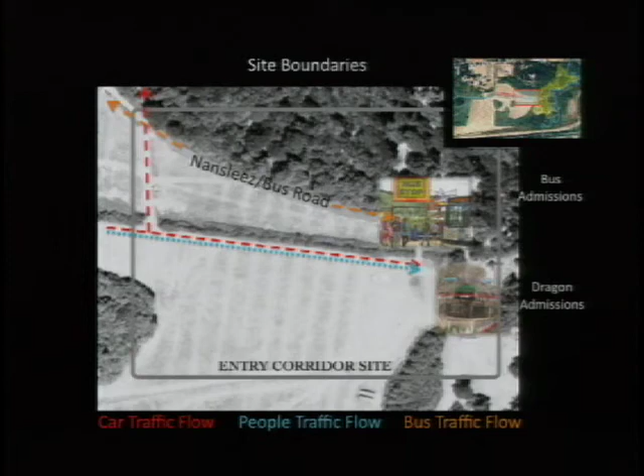The entry corridor is typical of crowds, sun, dust, and traffic.

Therefore, my third goal is to enhance the corridor by creating more comfortable places for humans, both aesthetically and environmentally.

The entrance area is recognizable because of the dragon in the Dragon Plaza and the pole star in the bus wait zone. These icons help people orient themselves and establish the mood of what's to come.

The bus zone is currently an unorganized area where people, bikes, motorcycles, and various demonstrations take place. As the fair closes in the evening, thousands of people find themselves waiting in line in this area before they exit by bus or by car.

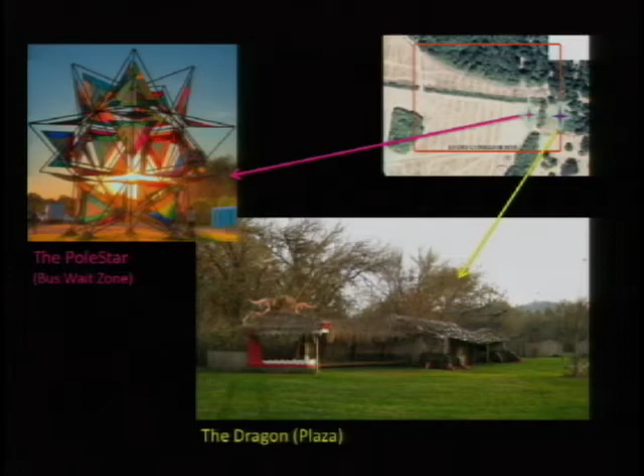The entry corridor before, and my proposed entry corridor. The entry corridor is broken up in my project into three major zones.

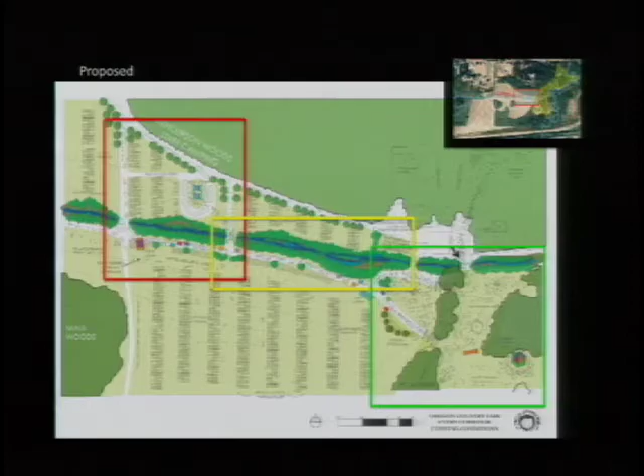The first zone is farthest west and is the place where cars, buses, and people transition from outside the fair to entering the fair.

The gate itself is given a large tent and followed shortly thereafter by periodic clusters of ash trees. The idea here is to give humans more shady places to rest and to begin building a feeling of arrival.

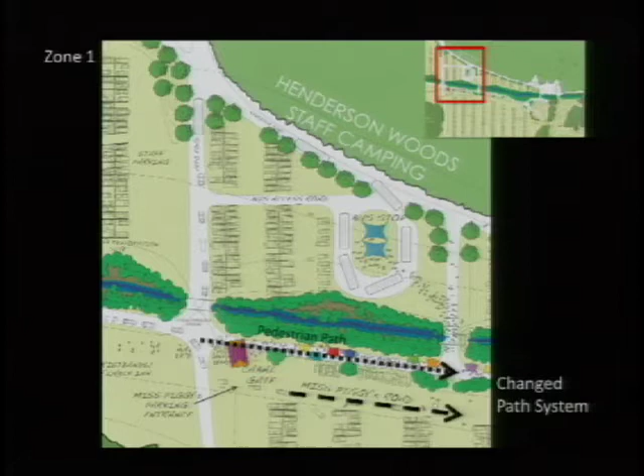One of the most dramatic changes to happen in the active programming of this area is the creation of a new bus stop zone located north of the Indian Creek.

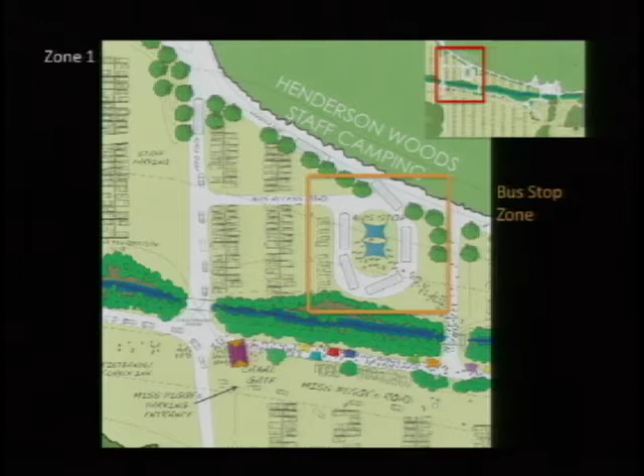The bus zone would be a semi-permanent tensile structure, and the area would be large enough for many hundreds of people to hang out in and around.

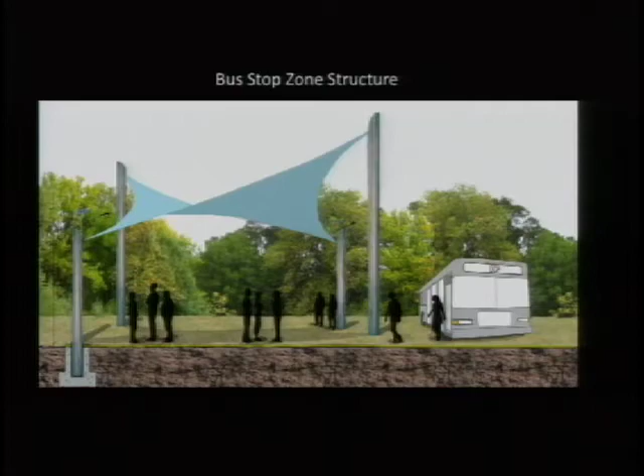For people needing direct access to the front entrance, a shuttle would be available for their assistance. For all others, their entrance to the fair would now be joined with the masses by means of a new bridge. The placement of the bridge and bus zones were the result of three factors.

The first is the proximity between Arrow Road, an existing road, and the Nansleez bus road, which allows fluidity for a new bus route.

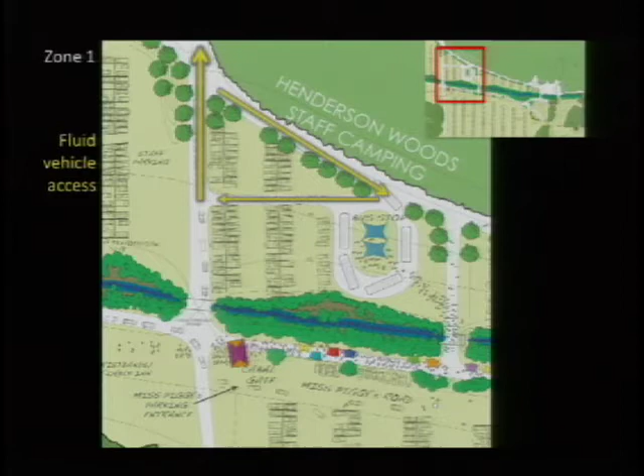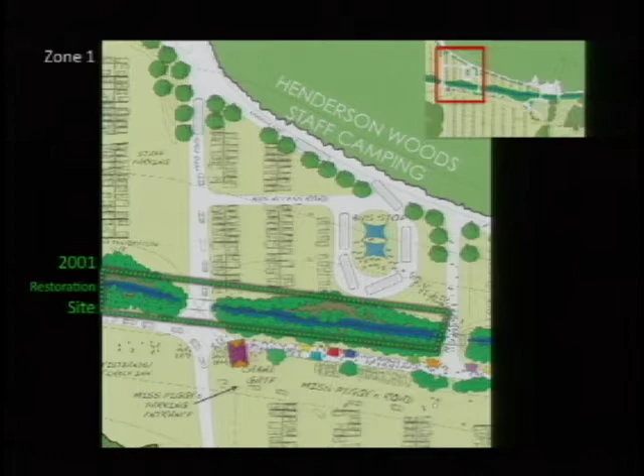The second factor for placing the bridge and bus turnaround here was the existing edge of the creek restoration that occurred in 2001. The third factor is simply because the distance between Chatham Bridge and Auntie M's Bridge is 775 feet, which is equivalent to 2.5 Eugene city blocks, without a break or crossing.

The new bridge will increase mobility across the Indian Creek and could also activate future planning for path systems within the fair.

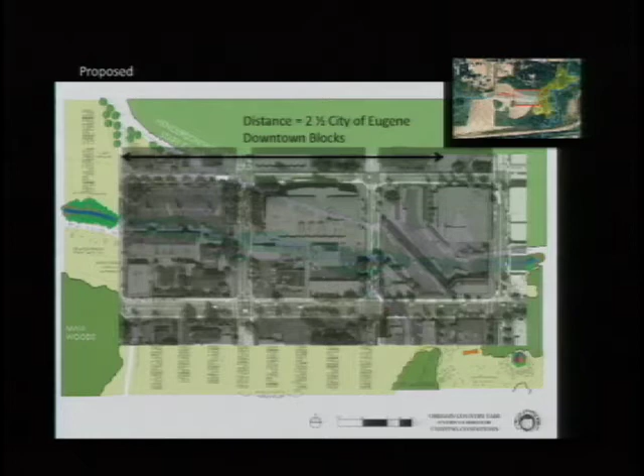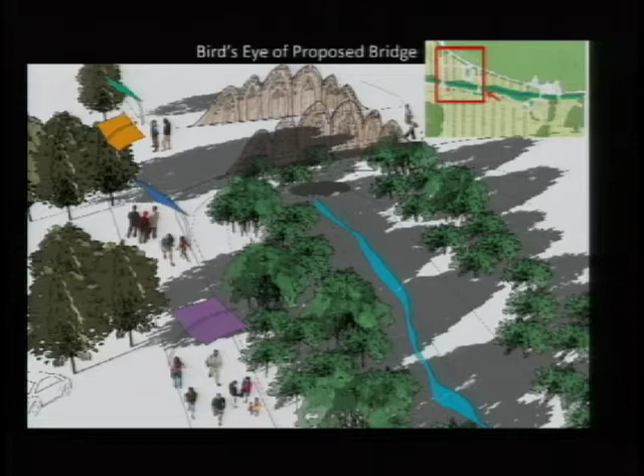This view is looking west. It is the location of the bridge intersecting with Chatham Path and connects the people from the bus zone to the entry corridor. The junction of the bridge and the pedestrian path will have the capacity to act as an entertainment area, a place for moving vendors, and a waiting area.

In this view, you can see the aesthetic form of the new Piggy Bridge. This form is very elaborate, but the intent is to show how the bridge works rather than creating one permanent form.

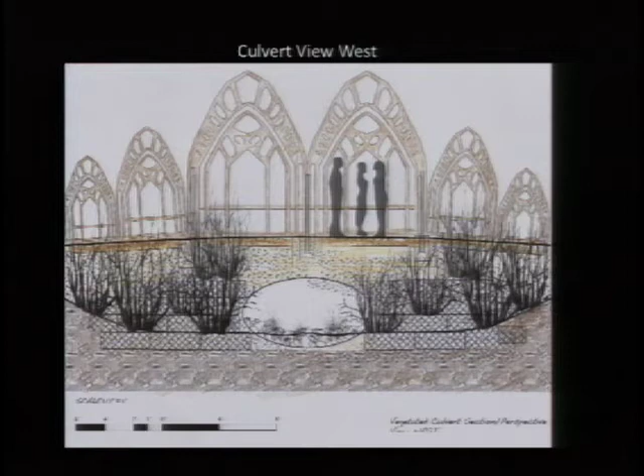Both the physical structure of the culvert and the bridge panels. I wanted to make sure that I was creating a bridge that could withstand flooding, would encourage and not hinder animal and fish transport through the culvert, and would not increase erosion patterns.

The culvert itself is modeled off the ones installed in 2001. They would be countersunk and boulder-filled along the bottom. Eventually, sediment from floods would settle and would encourage plants and animals to pass through.

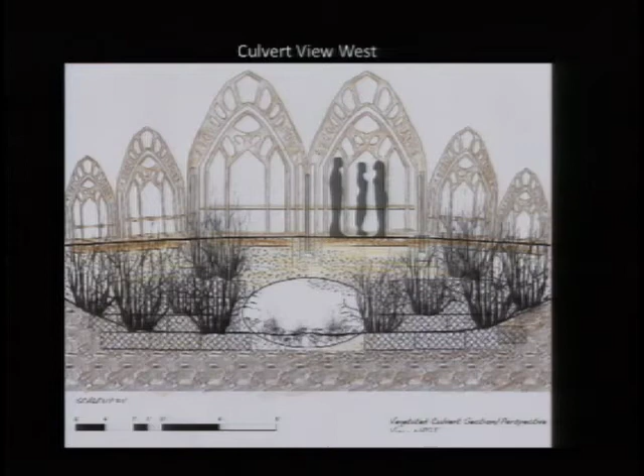The culvert is created through a system of stair-stacked gabions that are rock and soil filled. The gabions would be planted horizontally and vertically with live willow branches. And note, the bridge fencing would be placed into sleeves that would be built into the structure.

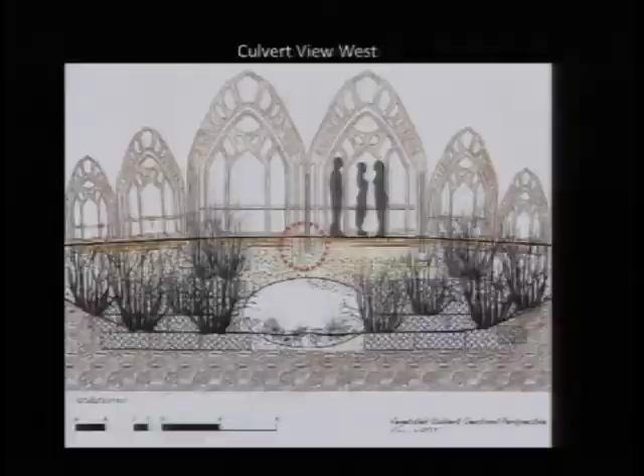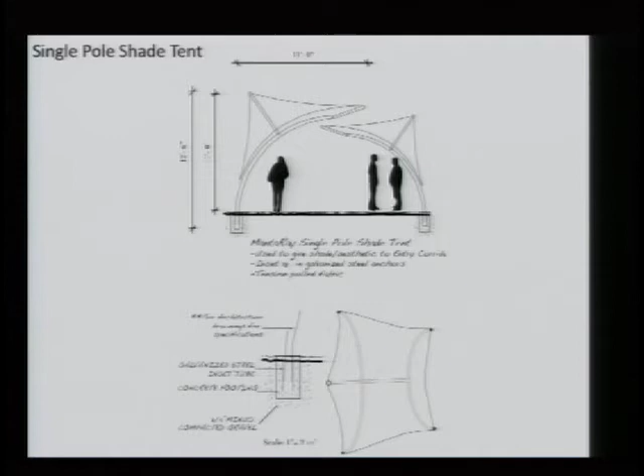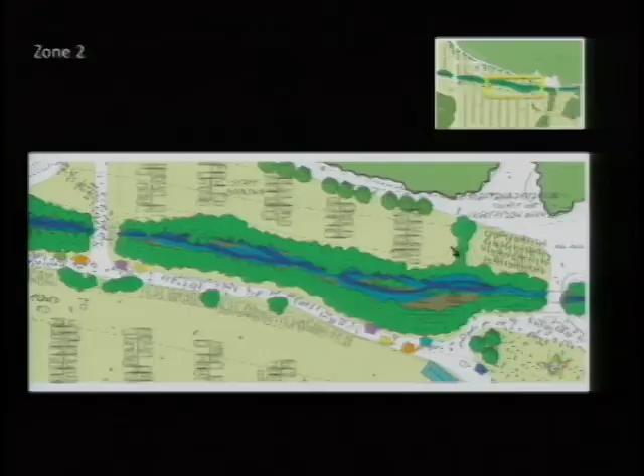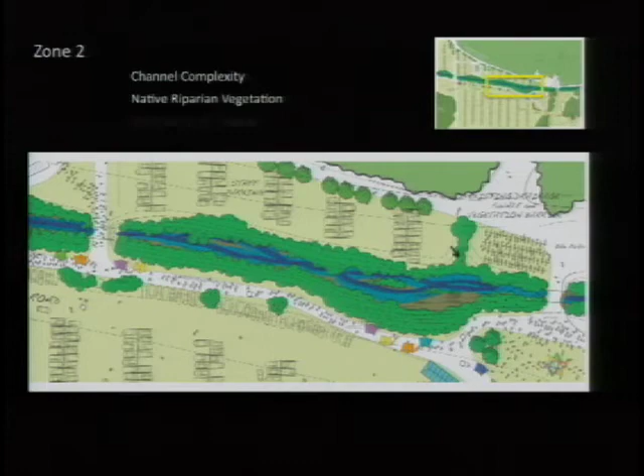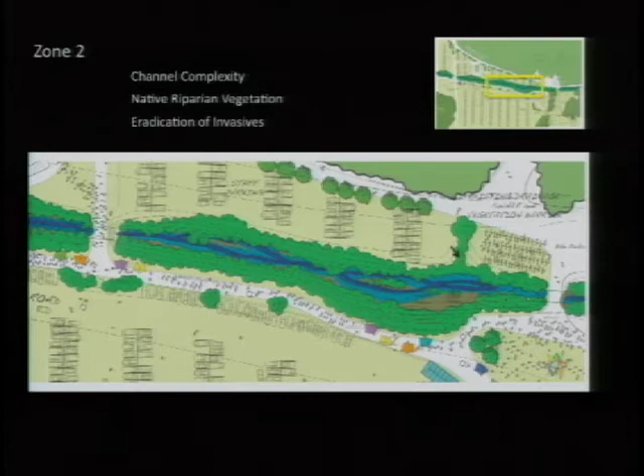The Piggy Bridge is the starting point for the second area of focus, the creek restoration zone. Using the previous restoration as a precedent, the major emphasis would be on channel complexity, native riparian vegetation planting, and the eradication of invasives. However, the previous restoration only occurred on the northern slope of the creek because of the restraint of Chatham Road to the south. This portion of the restoration would take place on both the north and south sides of the creek in order to create wider flood storage and pooling areas.

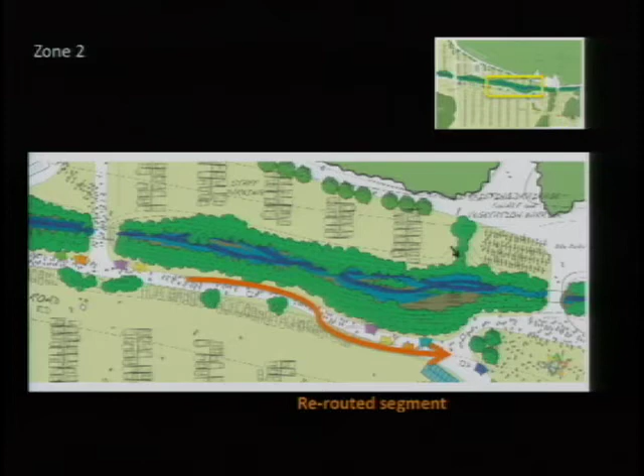Chatham Road would be rerouted in a 200-foot segment closest to the Polestar Plaza. In order to create a meander, long oval ditches would be excavated to create places for pooling.

In this section, the sides of the creek would be terraced in order to ease the slope and diminish scouring. The old road would be excavated and replaced with a mounded area and a dense planting of ash and other specified riparian plants. The riparian woodland would act as both a visual buffer of the linear path leading into the fair and would give the necessary shade for the creek below.

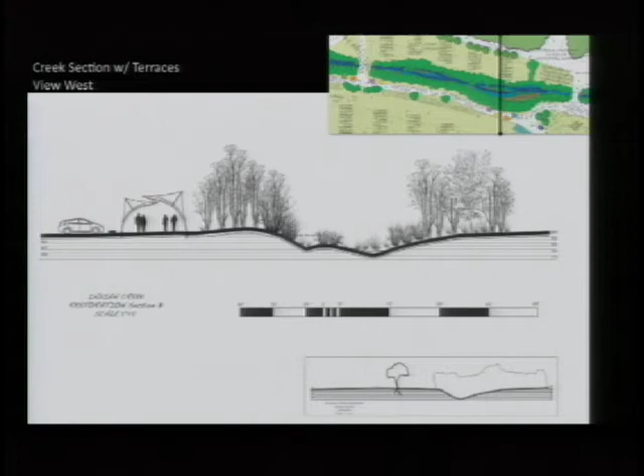In this section, human-placed woody debris would be set as makeshift beaver dams. This portion of the creek is given distinct attention to width, slope, and vegetation because of a historic drainage swale that exists here.

I see the existing swale as a place where water would pool naturally, and with a bit of encouragement could retain it longer throughout the year for fish and wildlife benefits.

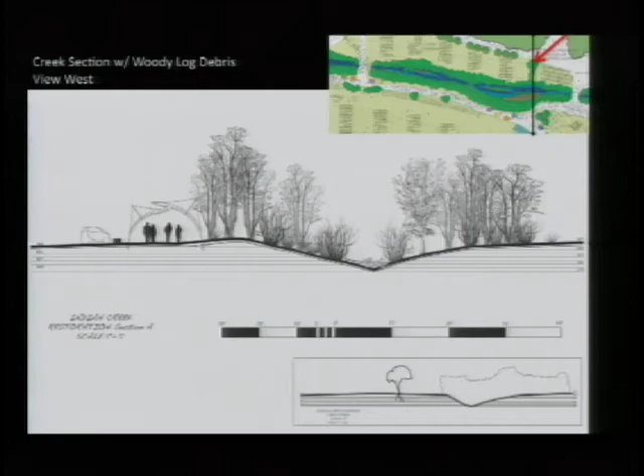The intent of this blow-up plant sample is to give note of the vegetative form used to create shade for the proposed pooling areas below.

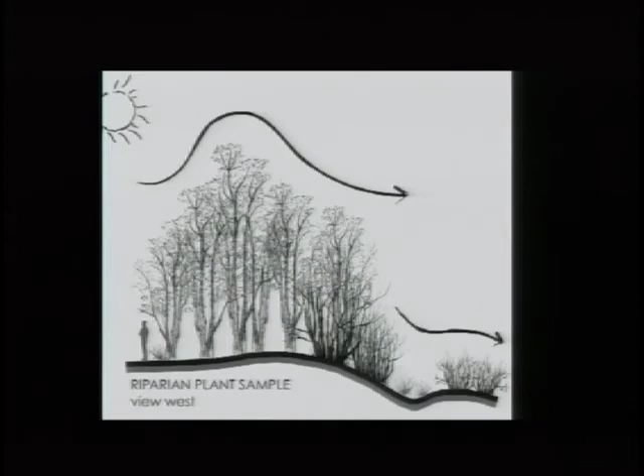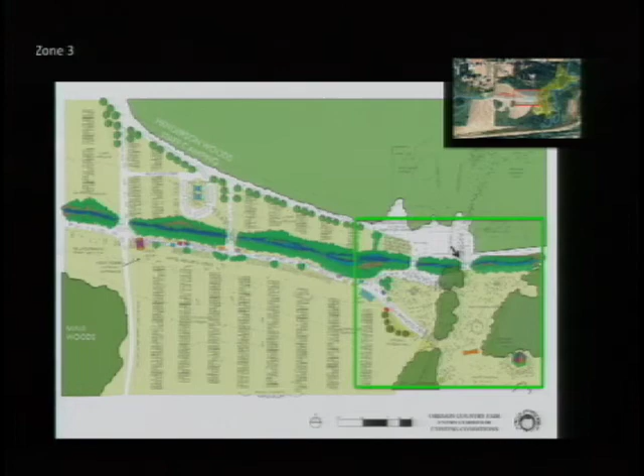The final zone is in the easternmost portion of the entry corridor, the entrance into the Oregon Country Fair. As you come into the plaza, it is filled with thousands of people. The creek acts as a landscape fence to keep the crowds moving towards the entrances.

On the southwest edge of the plaza, a small hill would be constructed from excavated material and appropriate soils, creating a mound that is 80 feet in length with a gentle 4-foot slope. This is appropriate for planting Oregon oaks above the floodplain, as well as giving a naturally shaded lounge area.

2 large admissions gates are situated here. It is important to have more than one entrance because of the number of people entering the fair. These gates are, however, much closer together than the old entrances.

I am speculating that the previous craft lot, which served as camping and parking for food and craft vendors, is now an open field with booths and stages, and will thus accept the new influx of people.

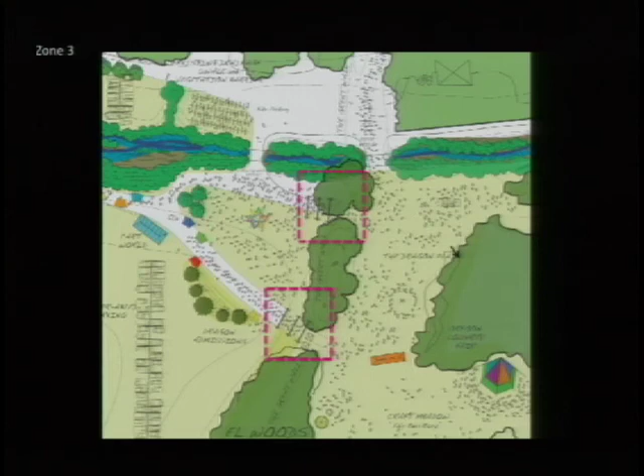In order to keep the flow into all directions of the fair, I am using Torii gate structures to stimulate crowd movement. These gates are freestanding structures that have weighted footings and solar power LED lights mounted on them. They give the paths a visual and atmospheric threshold.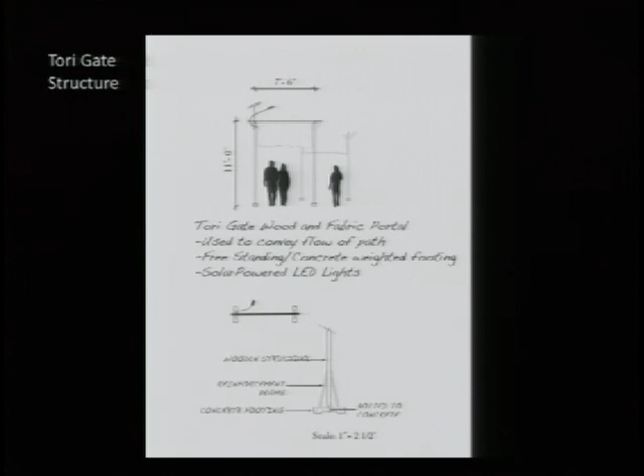At the admissions gates, oversized Torii portals would be placed amongst the trees.

The vision for the entrance plaza is to function as the holding grounds for people coming and going through the admissions gates. With the bus waiting zone moved west and increased shade zones, I see this area as flexible for watching performances as well as just sitting down and people watching.

Overall, I see the plan as being accomplished over a 5 to 15-year time period. The idea is to work on projects from the outside in, from the parking lots towards the entry plazas. By incorporating water quality, habitat, integrity of the site, and aesthetic value as guidelines for each zone, I believe that the dynamics of the entrance corridor study area can become more like the rest of the fair.